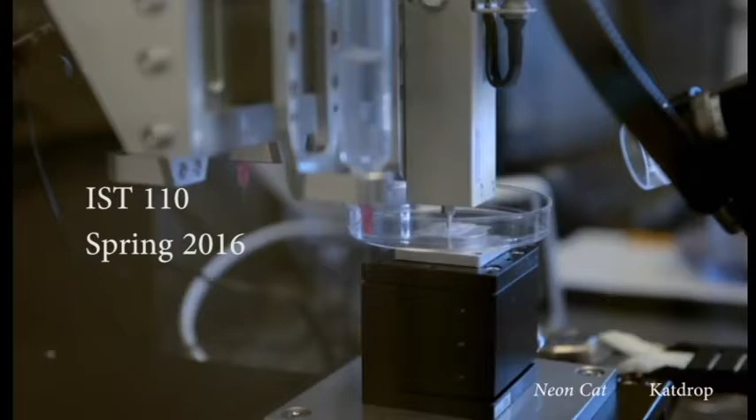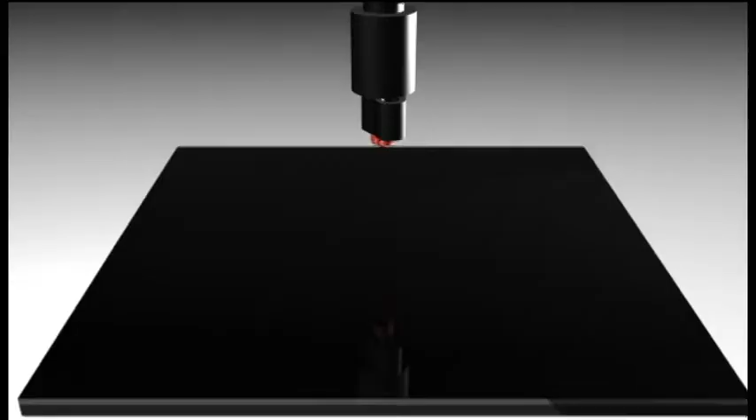3D printing is a rapidly evolving technology that has become more affordable and accessible to the general public in recent years. It seems like an incredibly futuristic feat, but it's actually been around since Lincoln was elected.

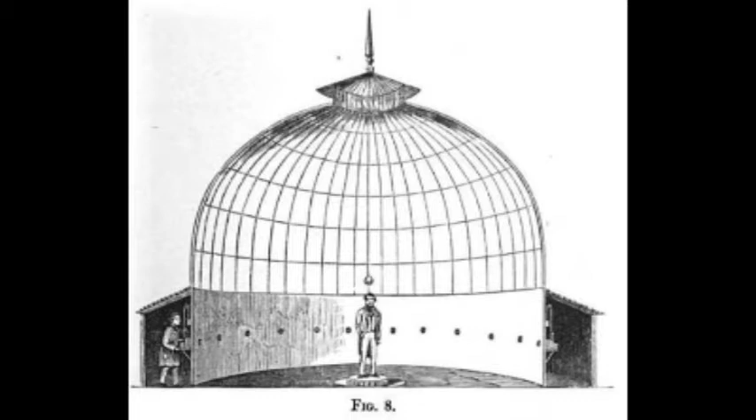In 1859, Frenchman François Willème began creating photo sculptures in Paris with techniques that could be considered a primitive version of 3D printing. Willème put his subjects on a circular platform with 24 cameras surrounding them, a camera every 15 degrees, simultaneously taking a picture with each to create a 3D profile of the subject.

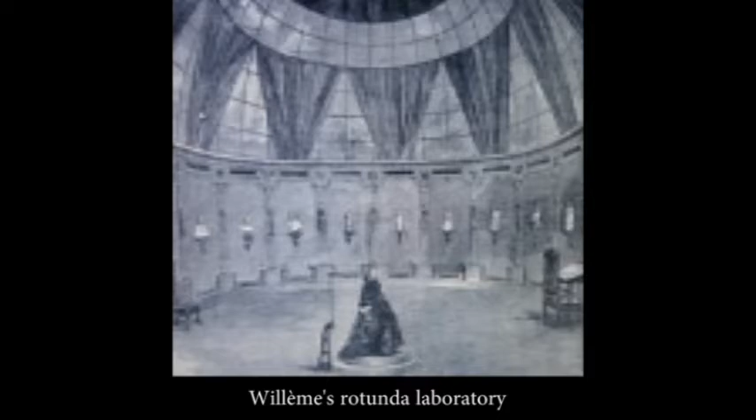After collecting this data with his scanning technology, Willème then projected each image onto a screen. He then used a pantograph attached to a blade to trace each profile while simultaneously carving each one into wood.

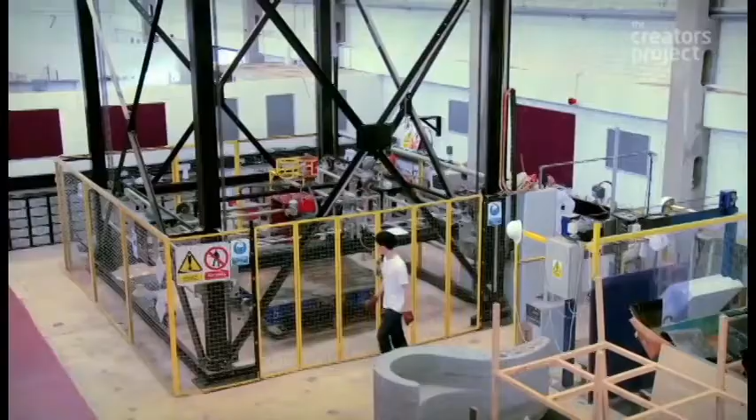The technology for what we know as 3D printing, or additive manufacturing, has existed in some form since the 1980s. The technology has not been capable enough or cost-effective enough for most high-end products or high-volume commercial manufacturing. 3D printing is still science fiction to a lot of people.

The idea that you can have a machine and send it a digital design, a 3D model that's virtual, and it'll turn into something real, a physical model, it blows people's minds. But this all might be about to change.

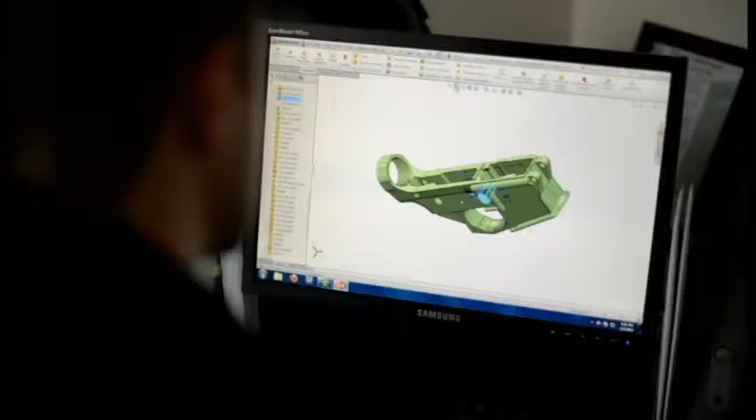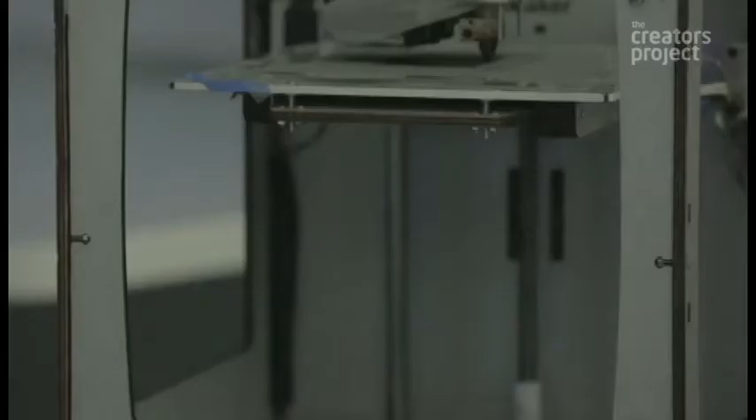In recent years, the technology has become less expensive and more accurate. For instance, some models of printers are now available for under $1,500 and are about the size of a microwave. This has allowed smaller businesses, entrepreneurs, and the average consumer to enter the field.

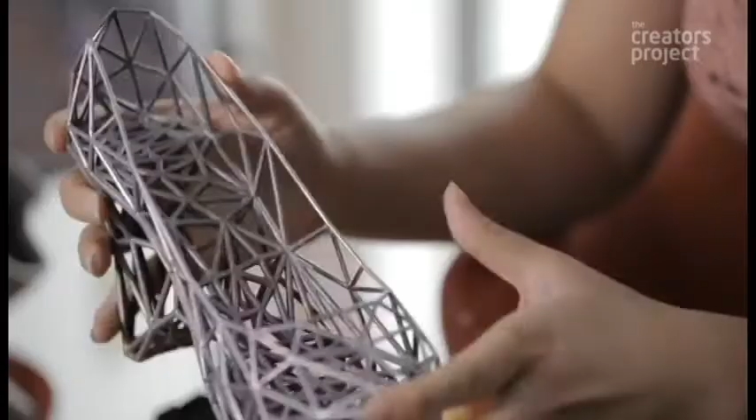We are now printing machinery for aircrafts and cars, as well as jewelry, art, toys, medicine, body parts, organs, food, and even weapons.

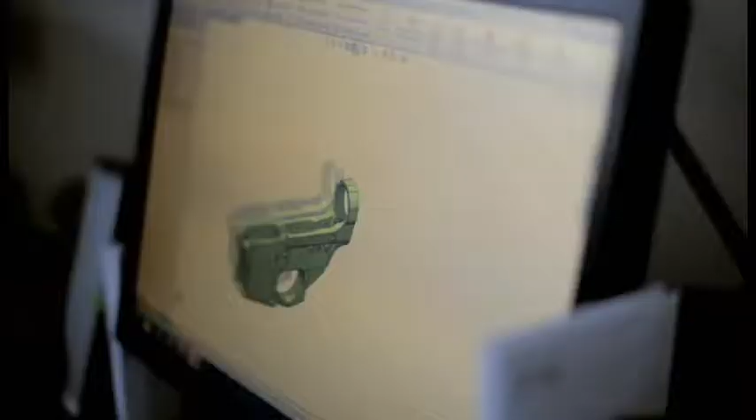When anyone with a printer can print anything, who's to stop them from printing anything? Cody Wilson, a law student in Austin, Texas, is leading a group working to create the Wiki Weapon. We want to build the printable gun.

The first in the world. Yeah, but the important part isn't to be the first, but to actually do it, to just have one. This project would put a weapon at every computer.

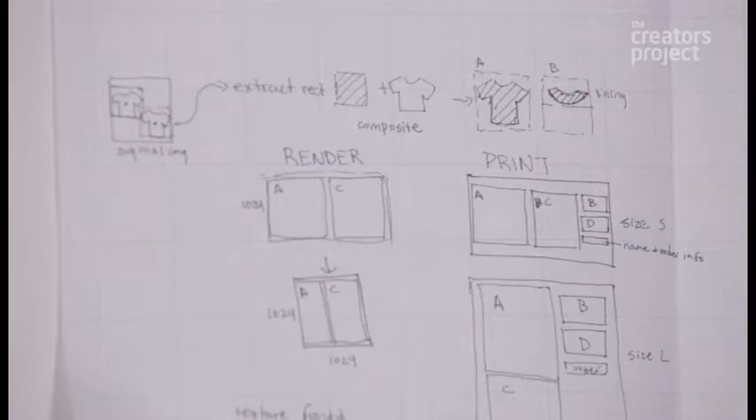The availability of deadly weapons aside, the success of the 3D printing industry calls another long-debated issue into question: copyright.

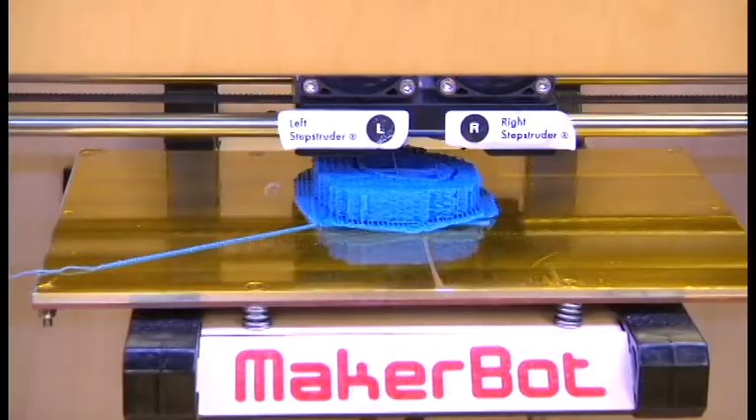The music industry is still fighting a war on copyright issues due to computers. The 3D printing industry can bring this war to the rest of the world. If you can build it, you can print it.

Back in 2008, you could download movies, you could download books, you could download music, but you couldn't download things.

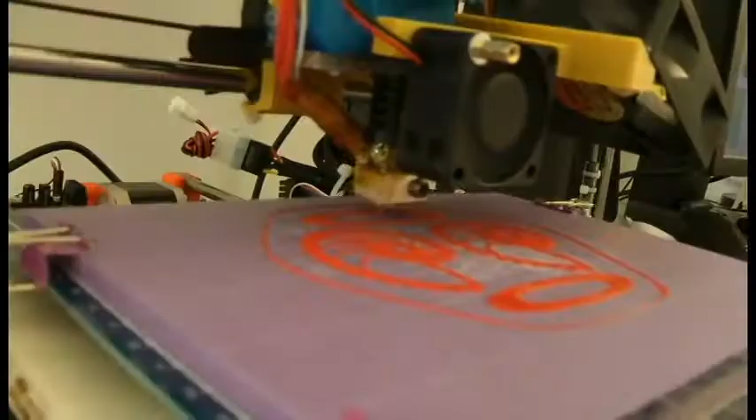Many popular 3D models have been made open source or free in response, including the plans for a 3D printer, the RepRap project. In 2005, Dr. Adrian Bowyer's RepRap project launched an open source initiative to create a 3D printer that could basically build itself, or at least print most of its own parts.

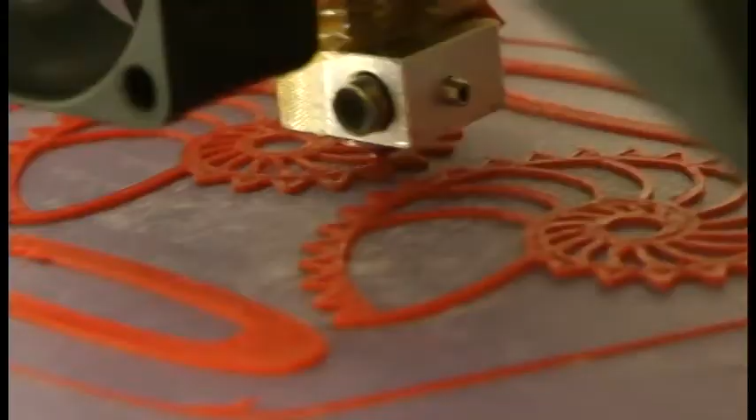The RepRap project does require a 3D printer to make the majority of the pieces, but also requires rods, glass, and various electronics. There are 3 axes: X, Y, and Z.

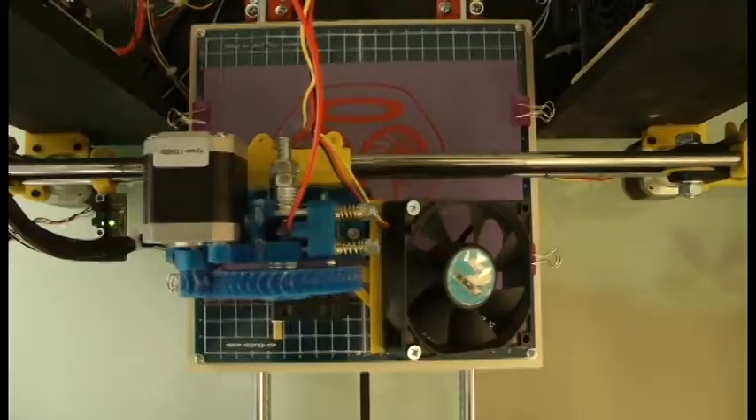There are 2 rods representing the X and Y axes. The extruder, the part that takes the printing material past the heater and out the nozzle, moves up and down on the Z axis on a large lead screw with a stepper motor attached. The rods also have stepper motors attached to the extruder with belts.

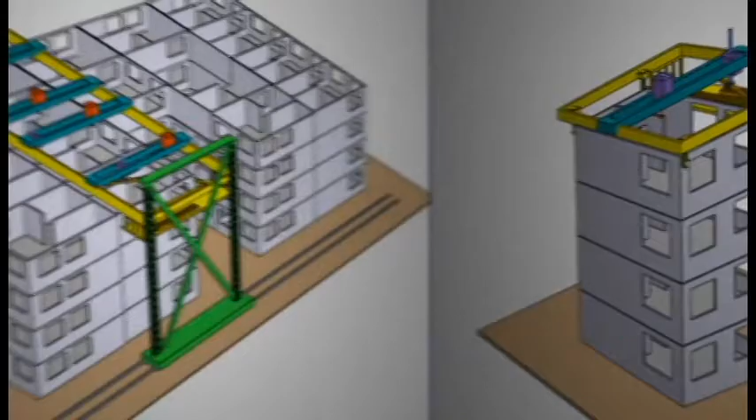Speed is especially a challenge when printing larger objects. Large objects require more material to be pushed through the printer nozzle, which generally has a set rate for processing material. There are various other models of printers, all of which operate under the same principles, but not always the same methods.

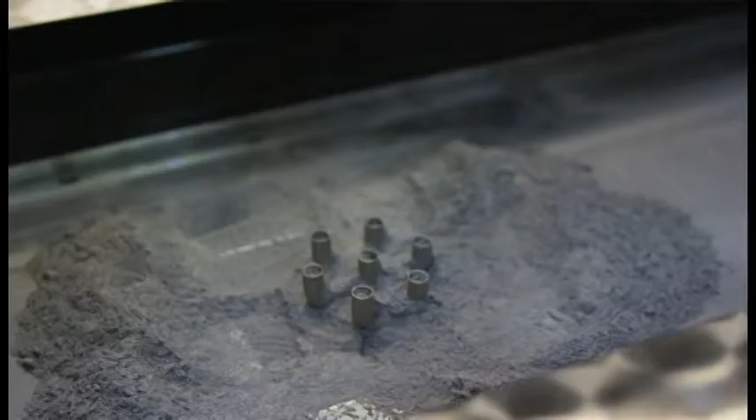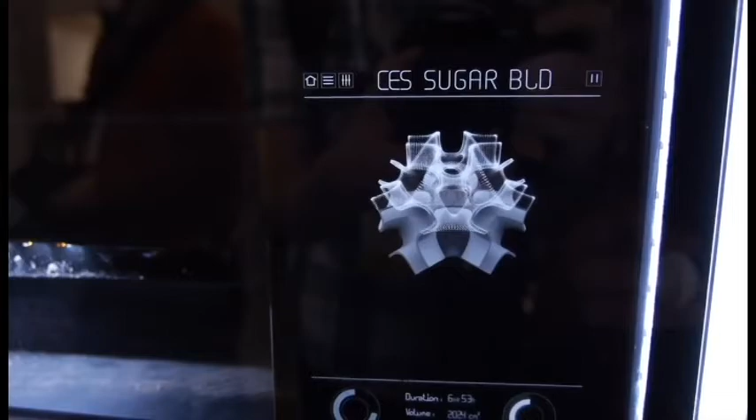The pursuit of multi-material capability will favor certain printing methods over others. However a model of printer gets the job done, it's the printed object that counts. The development of the technology will change business models, inventory operations, copyright law, and even military logistics.

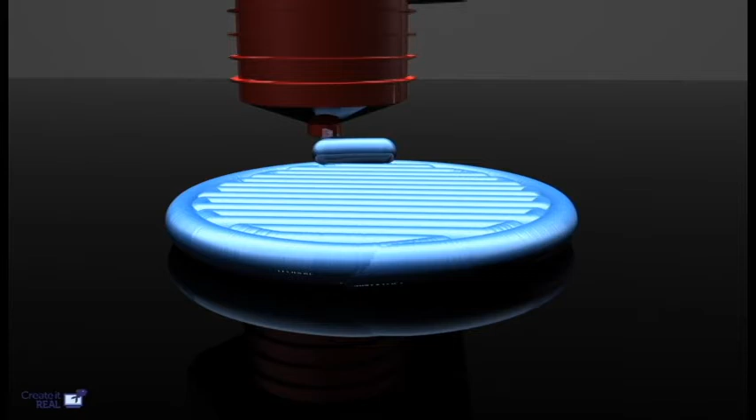3D printing is an ever-expanding field, and this video could go on for quite a while. We have covered where this great technology has come from, where we are now, and where we are going.